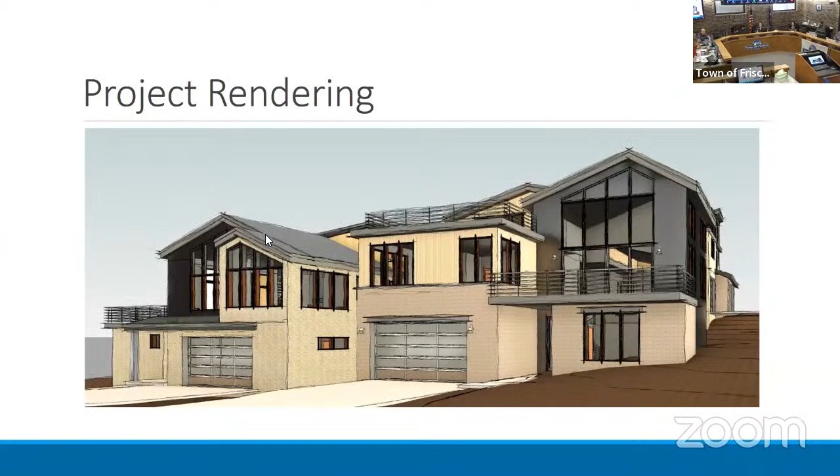And then moving on, we have our residential low density district dimensional standards. So the sketch plan is meeting this setback, lot coverage, height, and density requirements. The applicant is proposing that the east property line be the front yard. Lot coverage is at 45.4%, where 50% is permitted. The proposed height is 30 feet, which is the maximum height permitted. And lastly, the site is 0.48 acres in size, allowing up to 4 units on the site.

Moving on to the development standards, we have our steep slope standards. The UDC requires that on slopes from 15% to less than 30%, net site disturbance shall not exceed 50% of the total area within that range of slopes. So for this site, there is 7,937 square feet of area where the slope is between 15 and 30%.

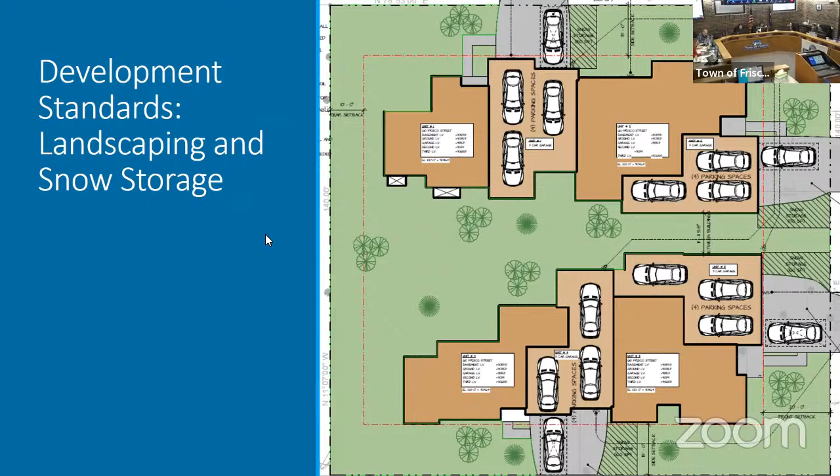As far as snow storage, the applicant is showing 640 square feet of snow storage where 475 square feet is required. So they are meeting the requirements for snow storage.

Here is a rendering of one of the elevations, as well as the exterior building materials. They do vary slightly between the 2 buildings; however, they primarily consist of natural wood siding as well as black siding, stone veneer, and metal trim. The UDC states that pure black may not be used as the primary building color. With that, staff recommends that the Planning Commission comment on the proposed materials and color.

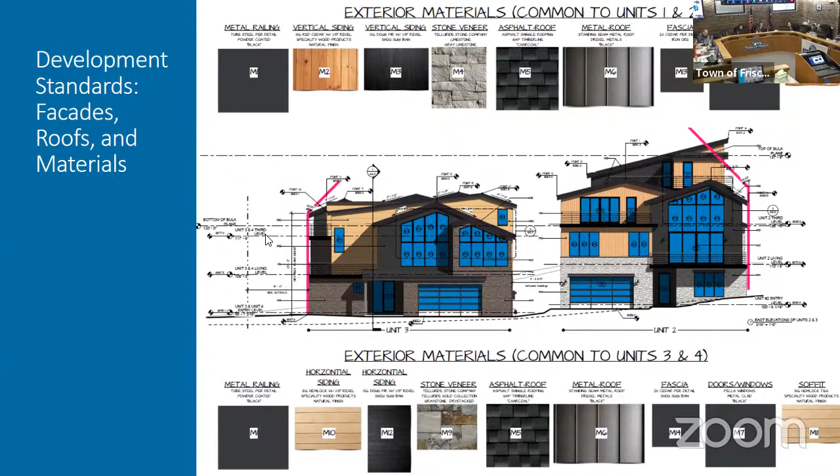Here we just have more elevations. We have the north elevation of units 1 and 2, which is from Frisco Street, and the south elevation of units 3 and 4, if you're looking from the alley. Then here we have the east elevation, from 7th Avenue, and the west elevation, which would be the rear lot line.

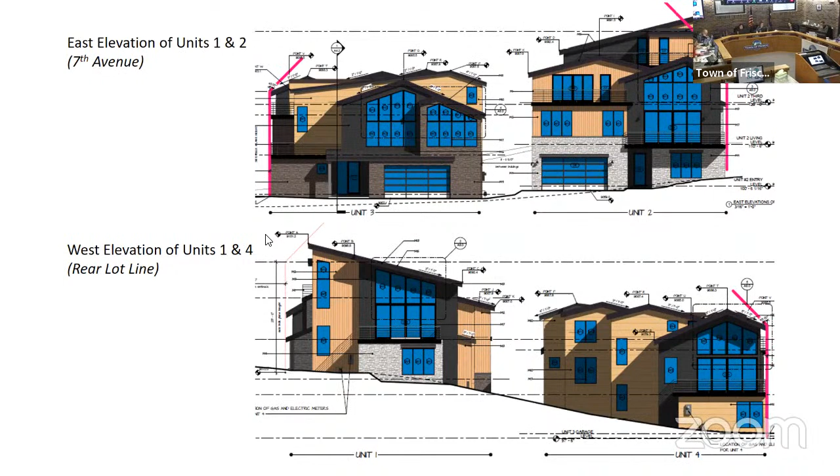And then these 2 elevations show the building facades that face each other. As mentioned in the staff report, staff does not feel that the north elevation of units 3 and 4 is meeting 4 of the building element criteria for the facade standards. However, all other facades are meeting those requirements in staff's opinion. So staff recommends that the Planning Commission discuss the proposed building elements.

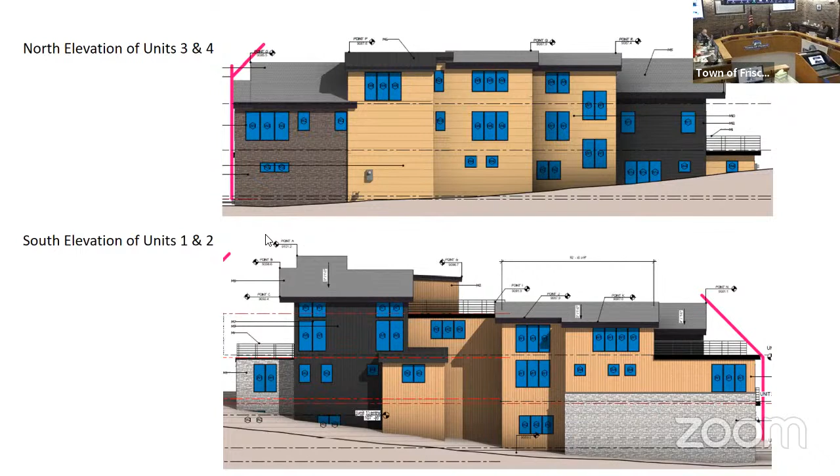That is all I have for an overview. I'm here to answer any questions. However, staff recommends that the Planning Commission does provide feedback to the applicant. They are here in the audience tonight, and I have a list of all of the elements that could require feedback.

Thank you, Emily. Robert, do you have any questions for staff? I have a couple. In the staff report, in the area where you're talking about how this meets the community plan, you hint, although I'm not sure you totally say it, but you hint that this is an acceptable development in this location because it's more for locals.

I guess I wouldn't necessarily point that out, but there are a variety of densities. This is low density, so it requires fewer units than some of the other zone districts. Well, I think the language that you pick up, and I mean we're still dealing with 4-bedroom units, we're still primarily picking up rental units. And so I think you're being a little aggressive in how you're describing how it meets the community plan, because I don't think the community plan anticipates every unit we build in town being a rental unit, or a tourist unit, short-term rental or long-term rental or whatever, but that we're trying to build stuff for local residents, and I don't think we're doing that in this particular project. So I'd love you to look at that again for the next time you write this.

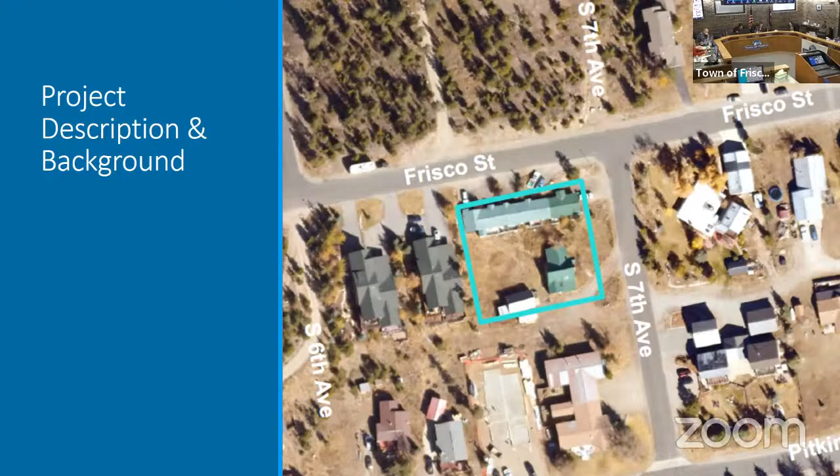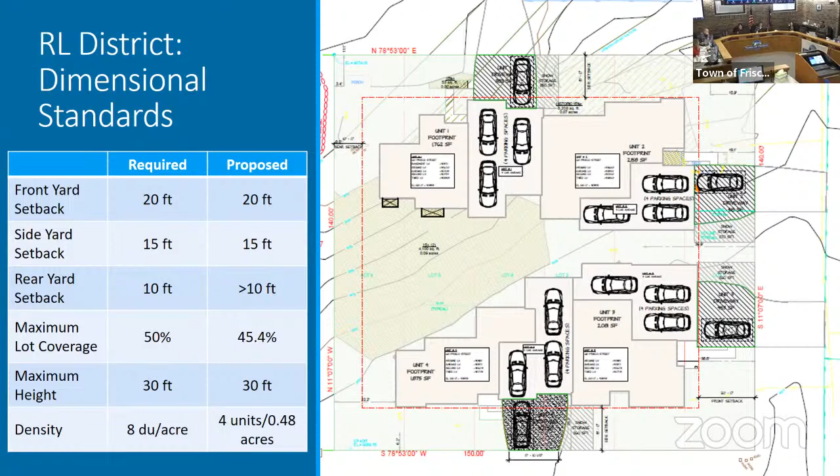Okay. And I'll take your word for it at this point. We can ask the applicant for more details on that as well. Okay, that's all I have. Thank you, Robert. Ira, questions for staff?

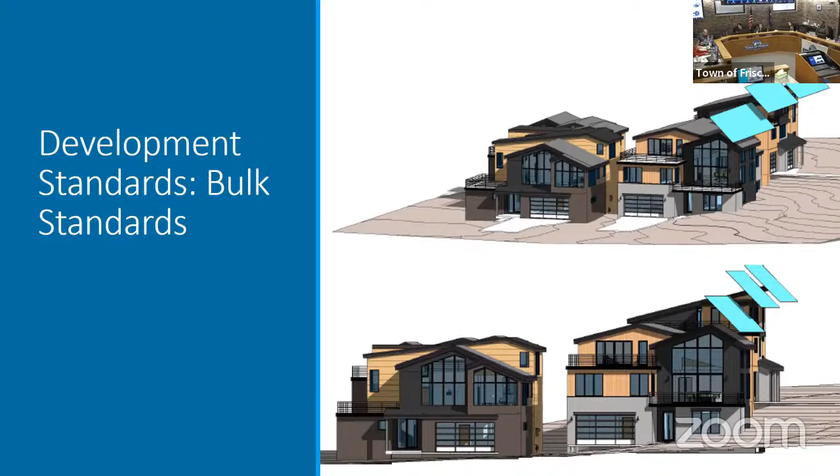Yeah, I kind of do have one here. Maybe I just don't know what I'm looking at. On A1.1, that shows some grading. It shows the green area, the steep slope. So there is this bold line that goes around.

It then becomes red, right here. Keep going, yeah, all that. What is all that? Right, so this is showing the area of steep slope, so that does not count as that steep slope area. Okay, and it's where the line is black.

Is that showing a retaining wall or is that just the line? Right, so right here is the building footprint, and then this is the disturbance footprint that they are showing. So this is where we had comments that there is only a 5-foot buffer between the footprint of the building and where they're showing disturbance.

We have talked to the applicant and stated that we would need more details on how they plan to build a retaining wall, what that looks like, etc. So with this being sketch plan, if a retaining wall were to be built, should that be shown at this time? We can ask the applicant what they plan to do.

Additional questions? I'm good for now. Lena, any questions for staff? So are these true duplexes? You called them duplexes and townhomes in the staff report, and I guess I'm just curious.

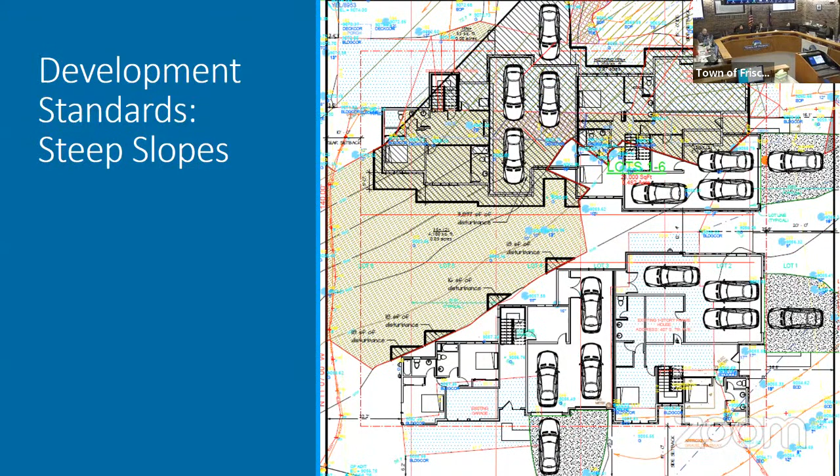There are some window wells, not shown on this rendering, but you can see it on this site plan. There's some window wells right here, and that goes out 4 feet, so that leaves a 1-foot buffer from that site disturbance area. That was kind of part of the comments I provided to the applicant. I've never quite seen construction maintained within 5 feet.

Okay, and so I looked at the floor plans. Are there any 5-bedroom units? There are, but the max number of parking spaces required is 4, so up to 4 parking spaces. Right, but how many 5-bedroom units are there here? I think there are 3, but the applicant may be able to answer that.

I don't remember off the top of my head. A little bit smaller? Yeah, okay.

I was going to ask the same question about the bulk plane, because I get what you're saying, it's going uphill, so the envelope shifts with the grade. I get that, but I think maybe we need that rendered a little bit more clearly, and that could be a comment for the applicant.

Okay, those are all my questions. Jessica, any questions for staff? I don't think I have any questions. Thank you. Andy, questions for staff? I'm just curious, Emily, would you lean in as well?

What do we think we're trying to do with this 30, or the grades between 15 and 30%? What is it we're trying to protect? What are we worried about? Because the site looks like a bomb went off right now. So we're putting a lot of effort into protecting what?

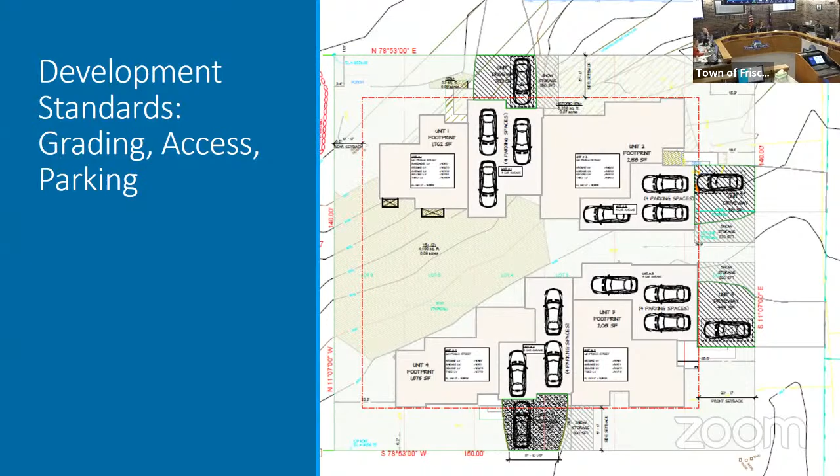Any other questions from anybody? All right, we will move to the applicant. Mark, if you want to step to the podium and state your name for the record, then give us your presentation.

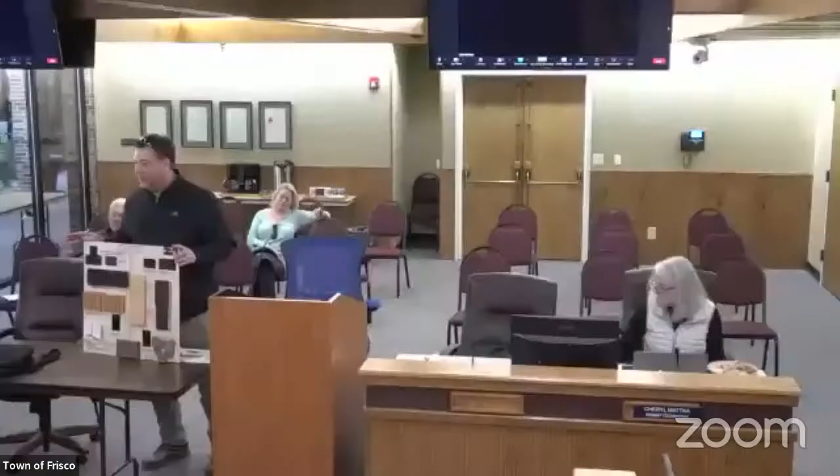I don't know if I need this now, but I thought it would be nice to bring the materials, so they're here if you guys want to. Would you mind passing it around so we can just see them? Thank you for bringing that, by the way. We appreciate material boards.

So my name is Mark Harris. I am the owner of SARC, who has been hired to design this property. As you know, there was an apartment complex on the property with an additional house or two, I believe. My client wants to develop it not only for his own use, he wants to occupy 1 or 2 of the units, and then sell the other 2, I believe. Conceptually, it's a larger site than a lot of them. He has a desire to have larger units. He wanted 4 to 5 bedroom units because he has a large family.

So we have done that. We are really trying to work within the historic nature of Frisco and give it an element of modern touches, but also maintain the historic quality of it. And that's indicative of the materials, I believe.

I'll talk about the materials real quick. In the old mining stuff, you see a ton of weathered wood, everything from black to gray to brown. So we felt it was essential to use materials indicative of that. There's stone, which is a natural material. Everything there is natural. We didn't want to bring in a lot of unnatural, unused materials into the scope of the work. And we feel that the black is the Shou Sugi Ban wood, which is charred wood.

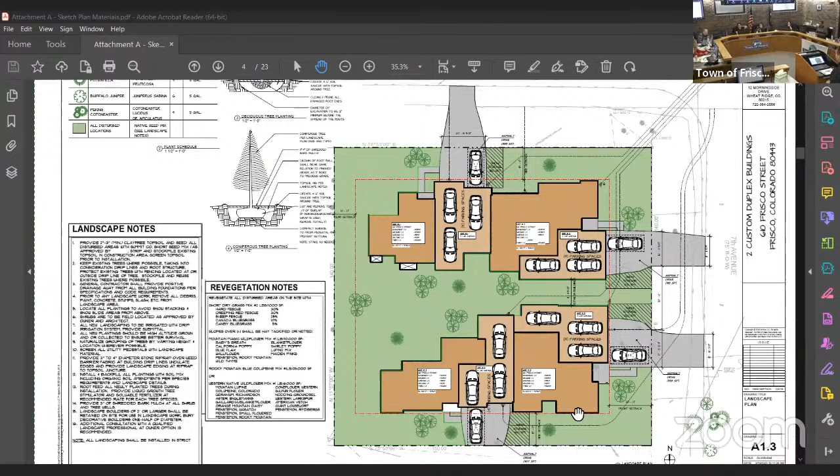Is it okay to ask who's your client, who's the developer? His name is Aaron Gleckler. And who is he? Just curious, because you said he's gonna live here? He said he's not gonna live here full time. He has a property here that he comes up every weekend already to ski with his family, and he's going to sell that and move into one of these. Okay, but you said he's keeping 2 of the units. I think for his extended family to use.

Who do you think will own these units, how will these be used? I mean you've designed them. I think it's gonna be a more permanent person. Oh really? I think a larger unit doesn't, I mean it is nice to have a large unit for VRBO and stuff like that because you can put more people in it. But these are gonna be high dollar units, and I don't know that a VRBO can afford a higher priced unit. Again, I'm not into that game, I'm just doing what my client asks, and he's hoping to sell it, resell. These units have rec rooms, saunas, hot tubs, they're like 5 bedrooms, I mean they're designed for a short-term rental.

But I understand that that's not your issue necessarily. I mean, I remember you when I used to work here 20 years ago, so I hope that you have some connection to Frisco. You've been working here a really long time, and I just feel like these are obviously designed with a purpose in mind. So apart from that...

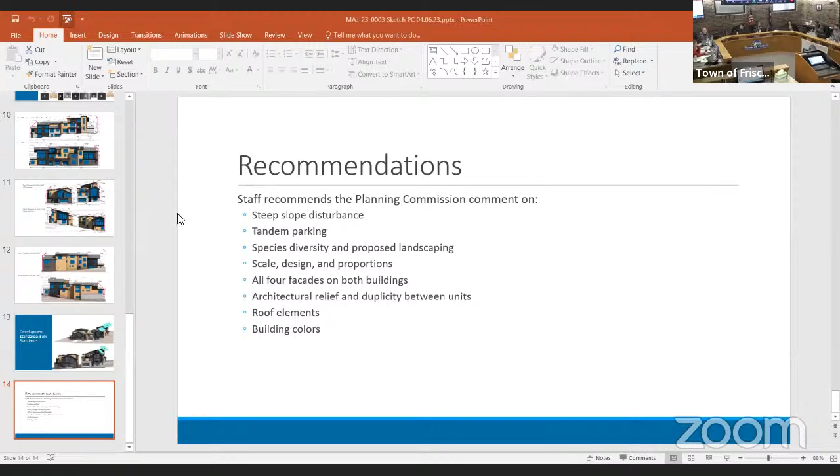Yeah, so on the issue of the steep slope, I get sort of why the code is there, but especially walking by this lot and seeing what's been done, I understand trying to limit the disturbance on that steep slope, but I'm fine with the current plan and just kind of keeping an eye on it. I think we can approve it the way it's shown, as long as they can build it the way it's shown. I sort of agree with staff on the north elevation of buildings 3 and 4, of units 3 and 4.

I think we need to work on the architectural features and the relief on that elevation. I think that has some issues and can be better, can be made to look like the rest of the building. It seems pretty out of place. Frankly, I think both of the interior elevations of the buildings that face each other could use a little glow up, so they look a little bit more like the rest of the buildings. Those two elevations in particular are a little bit boring.

The roof elements, I'm fine with. The scale you asked about, I think the scale's fine. I think it steps with the hill nicely. Building colors in general, I think are fine.

I am a little bit concerned that the one stone on the material board looks awfully white, and we've had some issues with white stone and people not really enjoying it. The sample on the screen here that I'm looking at from the online sample board looks much more of a gray color. If we can keep the stone more in those gray ranges and out of the kind of quartz-looking white colors, I would appreciate that. I think we can direct staff to keep an eye and make sure it's a little bit more in the gray and not that quartz white color.

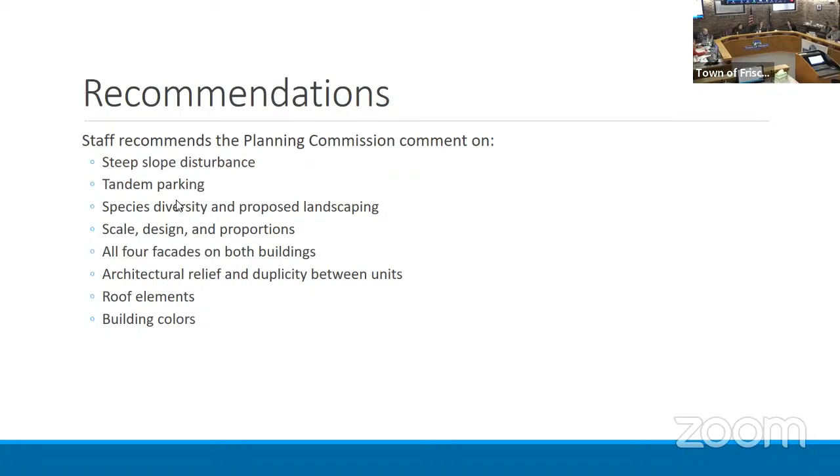Any additional comments? I'd agree with what Andy said, that there's a couple elevations that just are not meeting kind of the right aesthetic, and that we could work on that. The site, looking at it today, like what happens in the past to these sites and the slope disturbance can just be impossible to monitor and fix, but I'm comfortable with how we've handled it here. And I do expect that it's done appropriately and we don't have trees go missing where they shouldn't, or half of hillsides gone when they were there.

I like the look of it. I agree with windows, but I also think in our climate that people are like, it's freezing and I'm not going to heat the outdoors, so they'll put up blinds. I would like to see that scaled down a little bit. It seems very bright. And I'd like to echo that.

I agree that it's unfortunate to see this not be housing, and fortunately it's not our purview to put it on individual owners. I'd like to see more in our codes to do things and actual buildings being built by our government to help do this. So hopefully some of these great projects coming down the board will achieve some of this, because we are in a dire situation in our community. And where's that silver bullet? I don't know, but it's hard to see 10 locals displaced on this property and something going in that is not going to be at a local threshold.

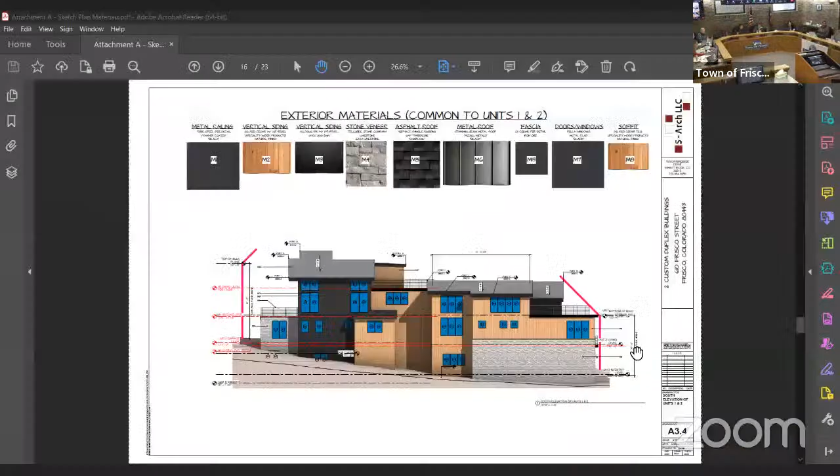A3.4. Are we talking about height or length? That whole stone facade down here, how long is that? I don't know. I mean, this is bare wall here. It seems like a pretty large plane to me.

So that would have been a question I would have had before, if I remembered. Yeah.

I think we asked you to fix those, but I don't think the 27 feet you're quoting is from the code. Oh, is that right? They have to have four of the architectural elements required in that space, and that's what we're saying—maybe they need to add some architectural elements on this elevation, but I don't think they're required to break it up every 27 feet. I think that's—okay, I'm done.

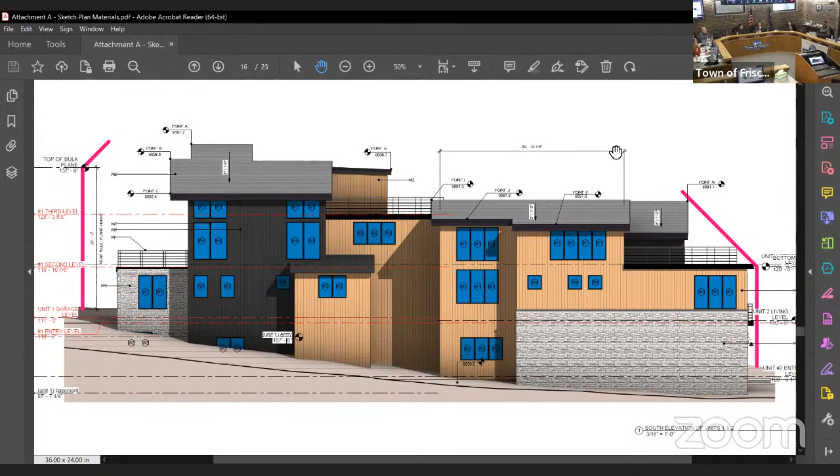Sure, I'm home. Robert sounded like he was gonna just put it down and leave. Any more comments on sketch plan? Do you have what you need from us, Mark, for the next go around? Yeah, and do you issue— I forget, what do you issue out, your guys' comments, or in a staff report?

We will have minutes at the next planning commission that are approved from this meeting, which will have some comments in them. And there's always the recording online too, if you would just need to get to sleep and rewatch it—there's a YouTube channel.

I mean, well, thank you for your time and the material work. I really do appreciate all of your guys' comments and concerns, but again, I'm not trying to ruin the community, so.

We understand, it's a hard conundrum we're all in. Well, it is, because we live in a community—you guys live in a community—that's desirable for a lot of people to come visit and spend a lot of money in. And they want to live here part-time and have nice homes. And yet you've got to find other places to put affordable housing and have the governments pay for it and things like that. So it's not solvable by all of us, it takes a larger community.

Well, thank you very much. Hopefully we have some good projects in the pipeline that will help put a dent in this. Thank you. All right, closing that agenda item and moving on.

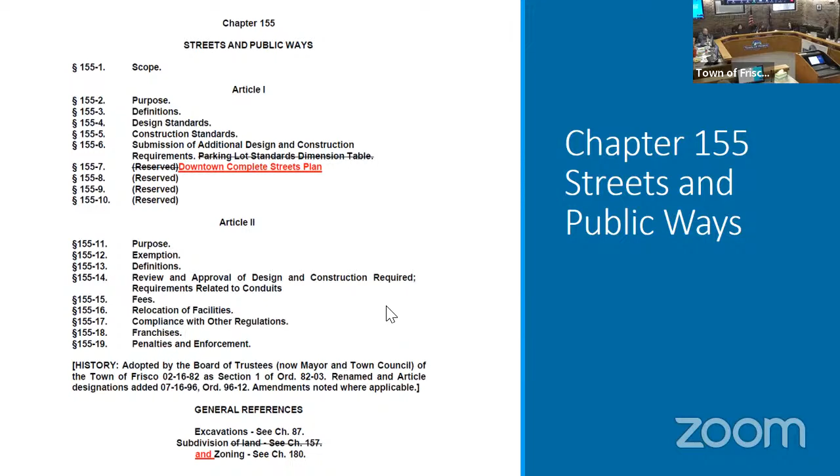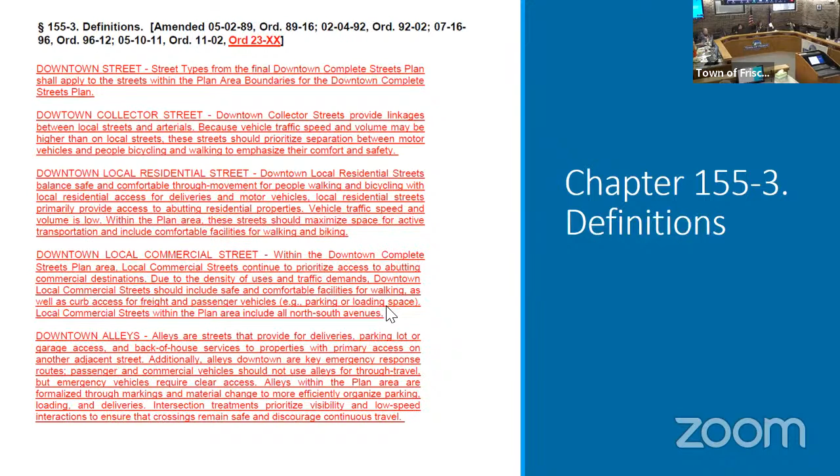I have a slide for each of the changes, highlighted in red. Since we've seen these before, I'll just run through them and you guys can ask questions at the end or ask for any changes. This is Chapter 155, streets and public ways. We're bringing the downtown Complete Streets Plan into this chapter so we have definitions for all the downtown street types. We're also saying that the dimensional standards from the downtown Complete Streets Plan apply here.

The minimum street design and access criteria chapter is kind of a supplement to Chapter 155. It contains the more detailed technical criteria for street design in the town. In the introduction to this section, we're adding a reference that downtown streets shall refer to the downtown Complete Streets Plan.

We're going to clean up the street classifications, removing 8th Avenue as an example for collector streets—it's actually a local residential street with a lower speed. We're also clarifying that Main Street access is prohibited, not just discouraged, unless no alternative exists.

This is a design speed guidance table for street types, and we added the downtown street types. This doesn't change the speed on any existing streets—I know that was a public comment. We also added clarifying language that design speed and posted speed should be the same, just referencing the Complete Streets Plan for widths.

More information on turning radius design as recommended by our transportation engineer. This language specifies the design vehicle to be used for downtown streets and gives flexibility of design based on a review by the Public Works Director.

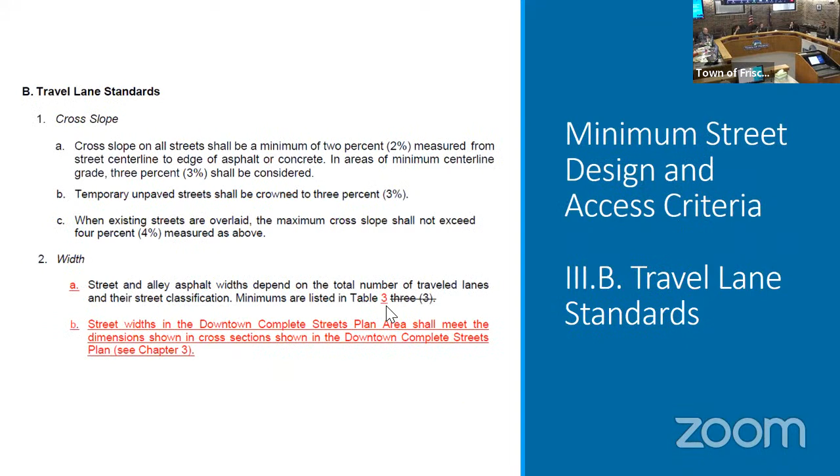Can I interrupt a minute? We talked about reducing the radius in this section, but back on page 6, under the design speeds chart, minimum center line radius, we lengthened or enlarged the radius. So are we going against ourselves at this point? I think it was more for consistency based on the design vehicle that our transportation engineer was using. So we're actually increasing—in this case, yes.

For the minimum center line radius, yeah, we did go back and forth about whether we could reduce them further, but for the design vehicle we were using, they felt this was the smallest we could go. I just noted a discrepancy between the two sections—is it the radius? I know we referenced the radius in a second place. If there's a conflict, we should correct it.

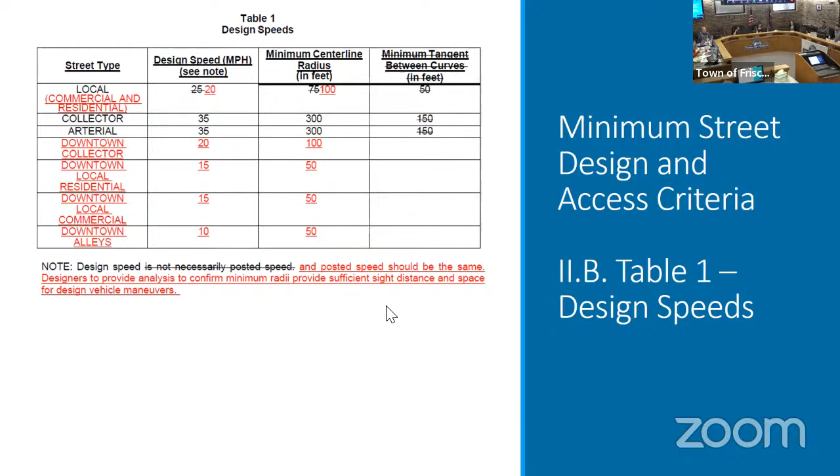Just to clarify, this radius relates to the intersections themselves rather than the center line radius. Okay, so these are two different types. The smaller radius on intersections like this is so you have tighter turns, so you have to slow down.

And these are the parking lot dimensional standards. We've moved this chart to be in line with the text in this section, as opposed to being kind of hanging out in Chapter 155. We also removed that graphic because we have graphics in Chapter 180 that illustrate the parking lot dimensional standards, and they don't look like they were manufactured on a fax machine.

So what does this do to our parking lots that we currently have? How is it different from what we currently do? It's the same chart—it's just been reorganized and put in a new place. Why doesn't the chart belong with the rest of the parking stuff?

Chapter 180, you mean? Some of the information is redundant between the two chapters. I would also say that 180 is mostly for on-property design, while a lot of this is for off-property.

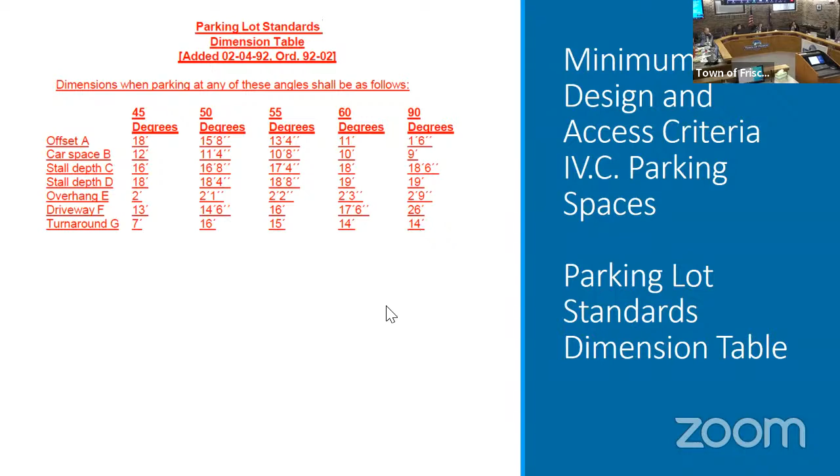Do Public Works have any issues with the 24-foot wide driveway that we need to clarify? They do not. Fire occasionally requests a wider driveway, and then Public Works would issue a waiver for a 26-foot wide driveway.

Susan, does multifamily dwellings include townhomes? So multifamily would be 3 or more, so it can be townhomes. Okay, because somewhere I had seen where townhomes was lumped in with that first category, single family, duplexes and townhomes. I don't remember exactly where though, so sorry. But that might have been on the last set of code amendments, with the administrative versus minor versus major site plan types of administrative site. Yep. Okay, and we did some rearranging with that because it didn't make sense.

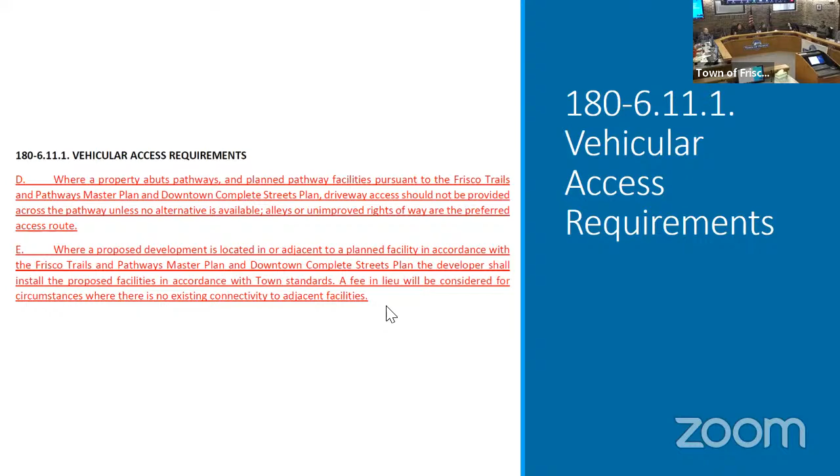Okay. These are the vehicular access requirements, just again referencing Downtown Complete Streets and the updated Trails and Pathways Plan. We're also adding the requirement that the Downtown Complete Streets Plan improvements should be constructed as part of their development.

And then for the parking standards and criteria, this is just restating the requirement that developers install right-of-way improvements in conjunction with their development, and that the spaces created can be used for on-street parking credits. That's it. Thank you. Any questions for staff?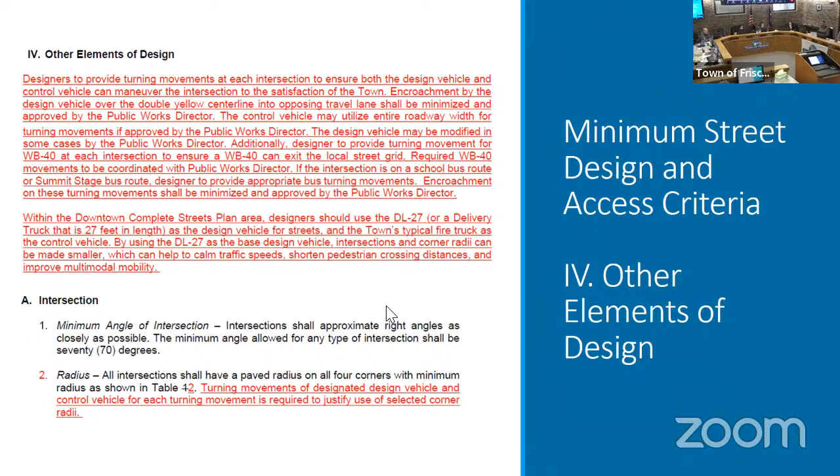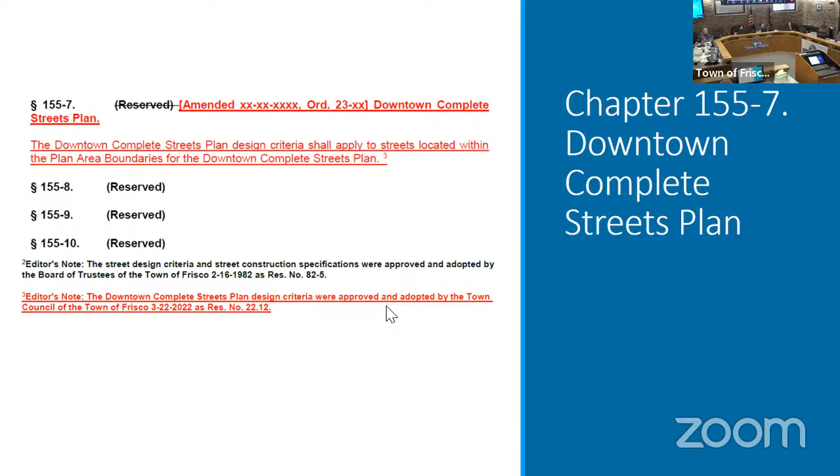Robert? No, I'm still struggling way back at the very beginning with access from Main Street, which I really like. It's number 5. At the very beginning. But it feels like that sentence needs something else in it. It says access directly from Main Street is prohibited. Access to what? Access to property. Yeah, it's in the section about access.

Okay, it just, when I read it, I read it about 4 times. Vehicular access. Yeah. Where are we talking about? Under number 5, where it says access on that last one.

Yeah, I see what you're saying, that it's vague. Yeah, it's sometimes better for us because if I say driveway and they say, oh, that's not a driveway, that's just a delivery drop-off area, something like that. You know what I mean? Vehicular access would be about the only clarification. Maybe you could add that. I'd probably like vehicular access. That would make it better.

Yeah, access just seems too broad to me. Like access of what? Pedestrian access. We're in a chapter though, that's called minimum street design and access criteria, so there's some context. I think. You're thinking people are that smart? Mhm, that's an assumption, huh. Okay, what's next? You guys are idiots. Under street classification, so yeah. Yeah, okay, so it's implied.

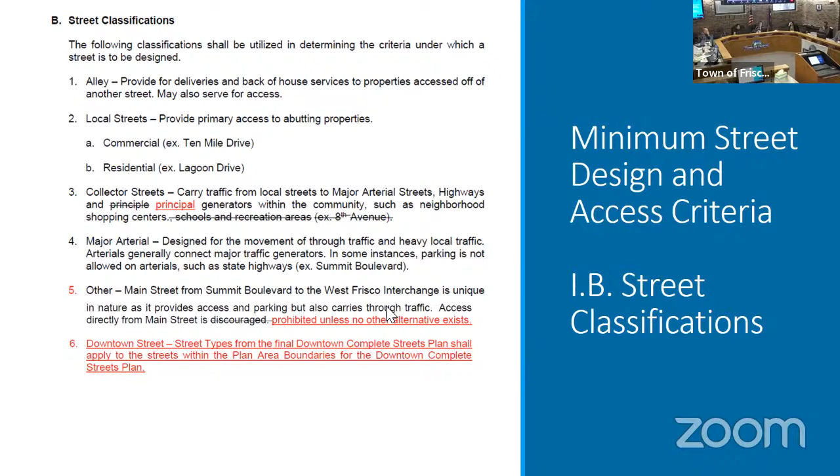I'm sorry, were you going around, or—oh no, please pipe in. It feels a little more related to getting developers to build the parking or sidewalks or whatever is included.

That within a certain distance of their property—because it would almost always be off of their property, right, since it's right of way that we're talking about. Are we specific about where, like within 300 feet, or what are they required to do? How do we define what portions of the complete street?

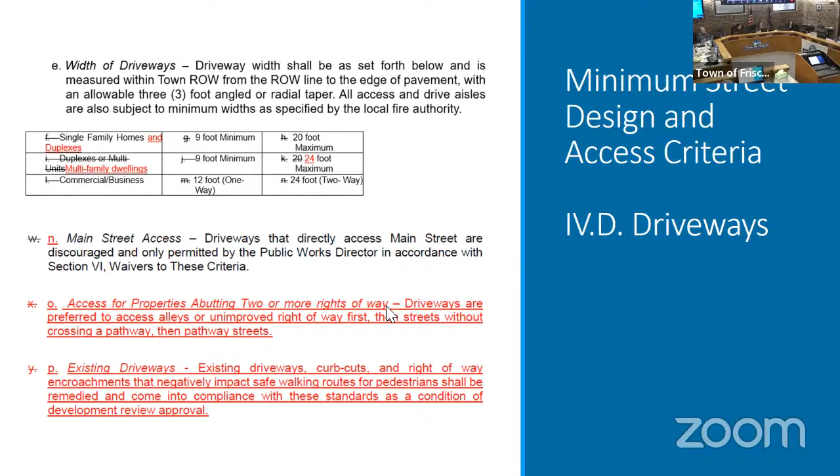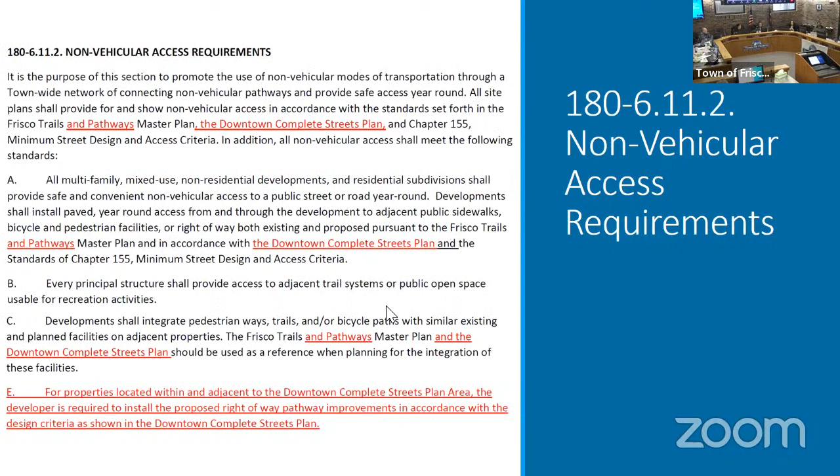What's gonna be expected if, some people—if you border 3 streets, are you required to build parking completely? Just want to make sure that's really clearly laid out. I'm not saying it's not right now, but I could see adding that language for contiguous.

Are we expecting them to pave the road or just the sidewalk? Like when it's an alley that's not paved, do we want people to pave the alley? It's in the downtown complete streets plans. There aren't probably a whole lot.

In downtown they all are, right? Yeah, except for alleys. Well, and that's not in downtown. So what about the alleys that are not in downtown? If a developer builds a fourplex and it's not part of this—like tonight's agenda item.

There's an alley there that's part of it, but it's not in downtown, so it's not governed by the complete streets plan. We could change that to adjacent to, or add some language about it being contiguous with the street. So we don't require anything of the developer who's building a fourplex outside of the downtown area.

If you are adjacent to a planned pathway facility that's in the Frisco Trails and Pathways Master Plan, you would have to put that trail in, but no street—we're not requiring sidewalks outside. If that's the case, I think this is something I would strongly encourage pushing on the radar.

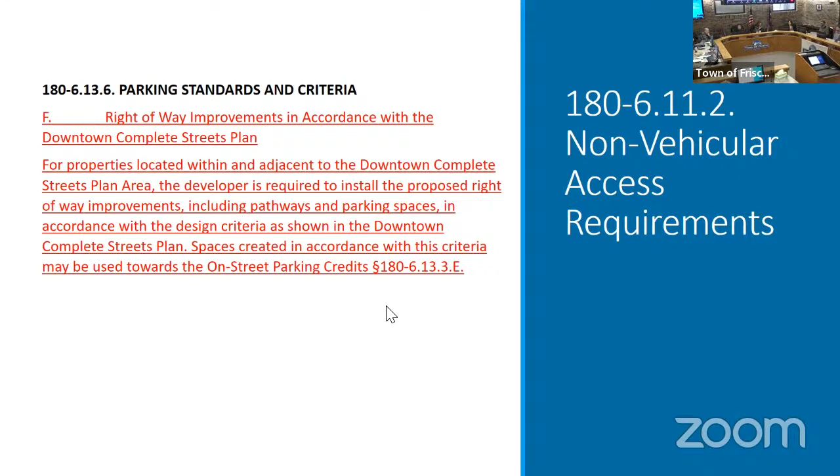Did you want to take public comment? Is there any public comment on this agenda item? If there's anybody online, please raise your hand if you wish to make public comment. Elizabeth, the floor is yours. Please state your name for the record. Elizabeth Fanning, we live at 300 Granite Street.

I want to thank you all for your service, much appreciated. A little comment on the microphones: it makes it very hard to hear a lot of you. It seems to get a little more relaxed as the day goes on, so please speak into the microphones, because there are times when we can't hear anybody on this end when we're not present. And if I could be, I would be.

We live on Granite, and I was just curious, we talk about collector streets, is Granite now one of those? And we saw the options presented for the sidewalks and the bike paths, and there are some options that, I know a lot of the community offered their opinions, and in the options that were provided we didn't see a lot of that comment taken into consideration. So are we going to have a chance to address that, and if so, maybe when? And if I'm out of line, please tell me if this is going to be addressed at a different time.